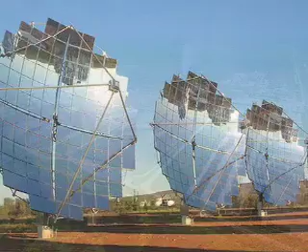We also know that finite resources means that one day they will run out. There are a number of new and improved energy technologies that have their place in this era of more responsible energy production, but most of them are not sustainable. They have inherent limitations and actually increase the cost of electricity to the consumer.

Solar only works when the sun is up. Wind only works when the wind is blowing. Biomass, waste to energy, fuel cell, and landfill gas all need a fuel source. And geothermal is limited to small regions around the globe.

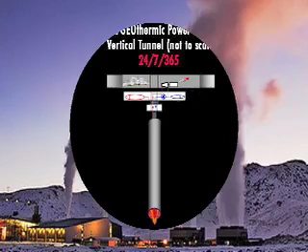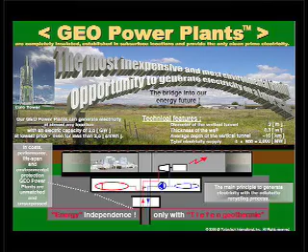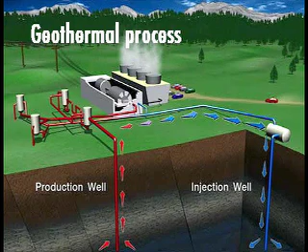But one technology developed by Sirex TIC is about to change all that. It's called geothermic energy and uses the inexhaustible supply of available heat from our Earth's deep solid rock region. This is not geothermal energy, which uses either hot water in pockets close to the surface or pumps surface water down to a shallower depth to be heated to a less efficient operating temperature for the production of electricity.

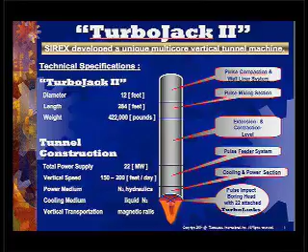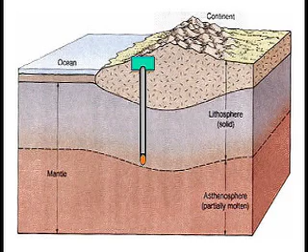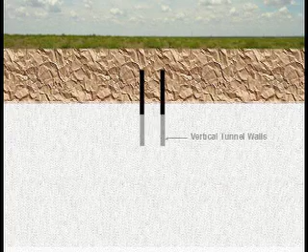At up to 12 miles deep and a 12-foot bore diameter, Sirex's new deep vertical tunneling equipment can now drill twice as deep with over 100 times greater bore diameter than the current technology, enabling for a greater volume of heat capture. These plants produce zero emissions, zero heat loss to atmosphere, have zero water usage, and are available 24/7, 365 on a large scale, indefinitely into the future for a fraction of the cost of today's energy.

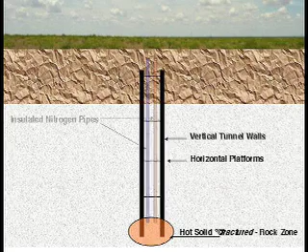This geothermic energy can be harnessed anywhere on land around the globe and become the basis for a new economy for any community or nation.

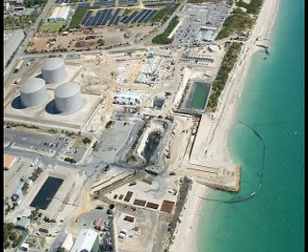Sirex's vision is to use this unlimited cheap energy to produce potable water from our oceans, and with these subsurface geopower plants, usher in the next generation of clean blue energy production and move beyond the green energy technologies.

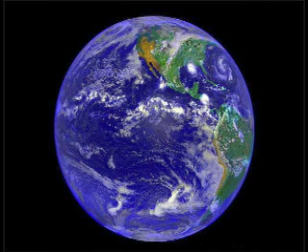Blue energy is emission and waste-free baseload energy from our blue planet as seen from space, versus green energy, which is either renewable or intermittent, has some form of emissions or waste, or may be produced from the sun in one form or another. We can clean up our planet and end this global competition for expensive, finite resources that senseless wars are fought over.

Sirex Geothermic. Imagine.

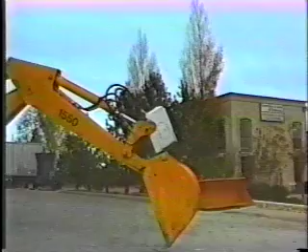A dynamic new revolution in power is now yours with Turbojack. Turbojack, powered by existing backhoe hydraulics, turns an ordinary backhoe into one of the most versatile and powerful pieces of equipment in the construction industry today.

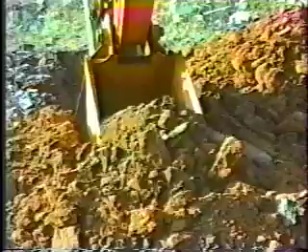With Turbojack, you become the leader over your competition with substantial savings in time, money, and manpower. At the touch of a button, you're in command with Turbojack, giving your bucket concentrated high-frequency pulse power.

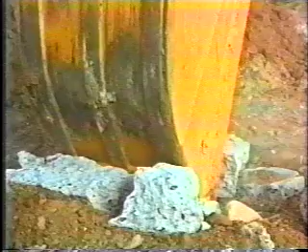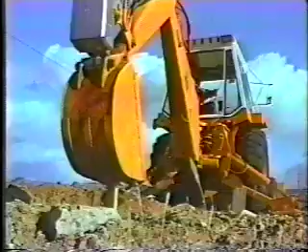Turbojack enables you to easily excavate and cut through rock, concrete, coral, asphalt, or frozen ground in a very short time. With Turbojack, you can also use your bucket to doze and compact backfill, drive posts, remove stumps, and screen material. Turbojack also handles sticky asphalt and mud with ease.

When a standard backhoe encounters unexpected buried rock or concrete, you can pound away for hours and still have little or nothing to show for your frustrating and exhausting work.

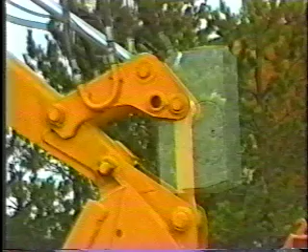Simply replace the static link between the curl cylinder and the bucket with the professional new Turbojack Pulse Power Unit. Turbojack easily connects to your backhoe's existing hydraulic system.

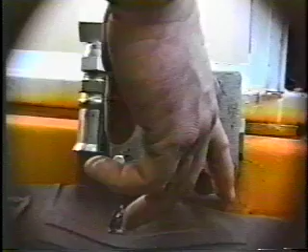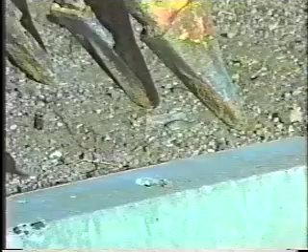A start-stop button and impact frequency control puts you in command of the dynamic Turbojack power system. Professional Turbojack installation on your existing backhoe takes less than a day. The revolutionary Turbojack Pulse Power system gives your bucket frequency-controlled jackhammer action to break through hard materials in no time.

Recently, on the proving grounds of a major European backhoe manufacturer, construction industry leaders tested Turbojack equipment.

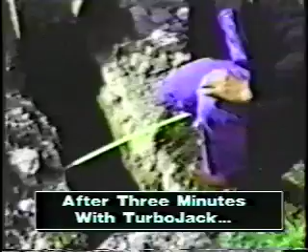Trench width through the concrete: 420 millimeters, 400 millimeters, 450 millimeters. Concrete depth about 150 millimeters. This is to follow on the trench without Sirex. We'll see whether the machine can penetrate the concrete.

After 6 minutes, the machine has scraped a length about similar to what the Sirex machine has actually dug, and has basically gone down bucket tooth depth.

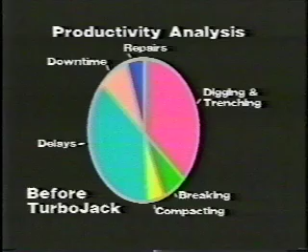What does all this mean to your bottom line? Turbojack saves you money by allowing you to trench faster, eliminating breaker and compactor attachment changeovers. Turbojack uses your regular bucket to do everything.

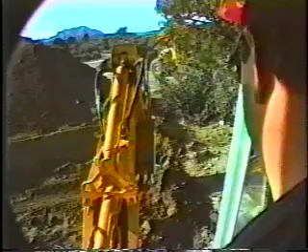Turbojack does not harm your backhoe in any way. It is actually less stressful than changing to other attachments, so your backhoe will last longer and need less servicing.

This glass of water placed on the backhoe fender dramatically illustrates just how smooth the Turbojack unit operates using the highest to lowest pulse power frequencies.

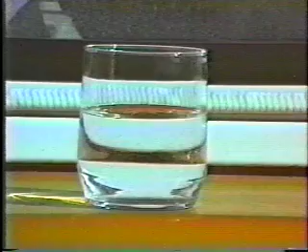For a small investment that is less than the cost of the average breaker, Turbojack will increase the productivity of your workers and ensure their safety.

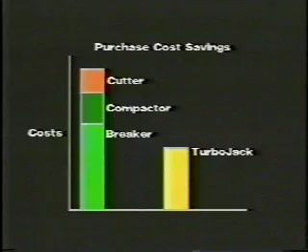TurboJack is manufactured with high-quality control in the United States. There's a 5-year warranty on the heart of the durable pulse generating system. Just attach TurboJack and forget it.

World-renowned precision German engineering excellence and the finest steel and brass materials combine to make Sirex the highest quality pulse hydraulic product in the international construction industry today.